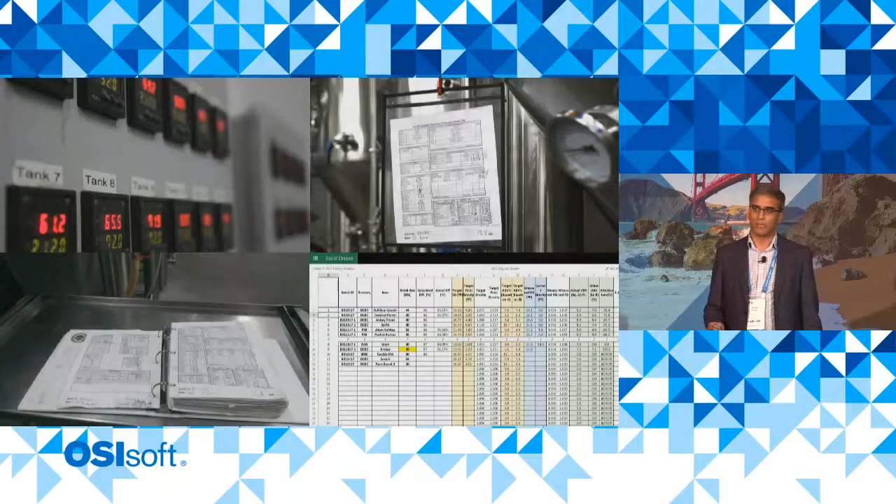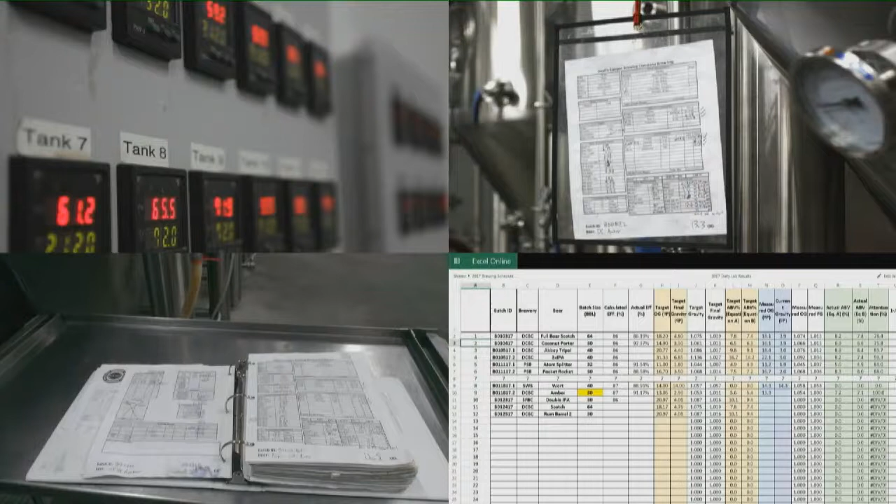So firstly, the scenario, the Devil's Canyon Brewery, which is in San Carlos, California, about 30 miles from here. It's a craft brewery, has 18 fermenters, makes really great beer. And their process, like all breweries, is a batch process. So this is what they have prior to us coming in with Pi System and National Instruments.

They had unconnected programmable logic controllers measuring temperatures and set points on 18 fermentation tanks. They had a manual logging procedure for specific gravity measurements, critical measurement in the fermentation of beer. They transferred those manual logs to a binder. Once in a while, they typed them into a spreadsheet on a PC, and that was their analytics. Not exactly real time, worked, but has some limitations when you try and scale up production.

And so we came along and we instrumented, together with National Instruments' help, using the CompactRio platform, a number of the fermentation tanks. In fact, this fermentation tank on this banner is about half size of the real one that's 35 miles away in San Carlos. This is fermentation tank number 6 out of 18 in the brewery. There's a thermocouple and a few other sensors, CO2 and pressure CO2 sensors in there as well.

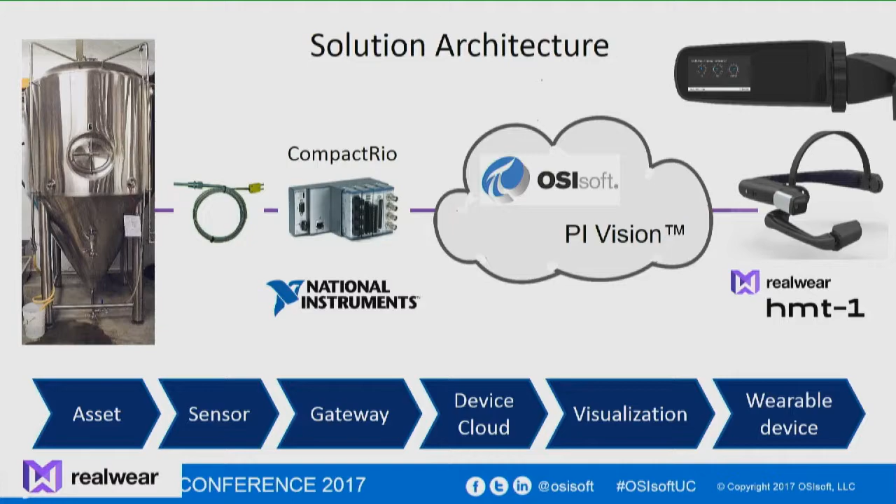Goes into the CompactRio platform. That is then connected through the cloud to the PI System and the PI Vision server. And we are going to view some of that data on this wearable device, the RealWear HMT-1 or head-mounted tablet. So if I can move to the demo, please.

So you are seeing on the projector what I am seeing in my micro display. It looks to me like a 7-inch tablet about arm's length away. It's, as you can see, quite detailed. This entire device is hands-free, so I've re-enabled the voice recognition, and I will now start up CoreSight. My programs. CoreSight. It's a little app that's going to visualize CoreSight data for us.

Okay, now it's looking for a QR code to log me in. There's one on that tank, in the real tank in the brewery, and there's also one on this picture of the tank. Let me go and scan that. Got the tank. We've got an error there. Here it comes.

Okay, so what you're seeing now is live data from this brewery tank, from this fermentation tank. You see CO2 pressure. You see specific gravity. That was a manually entered measurement because it's a manual procedure, but the data is in Pi system. And you see the current live temperature of 32.887 degrees Fahrenheit off fermentation tank number 6. This is live data. Show temperature graph.

So now what we're seeing is a visualization that is actually hosted on PI Vision, and we're looking at a web object that was built by PI Vision that's now encapsulated in this native Android application, which has full hands-free voice control. I haven't had to swipe or use any gestures or use my hands at all.

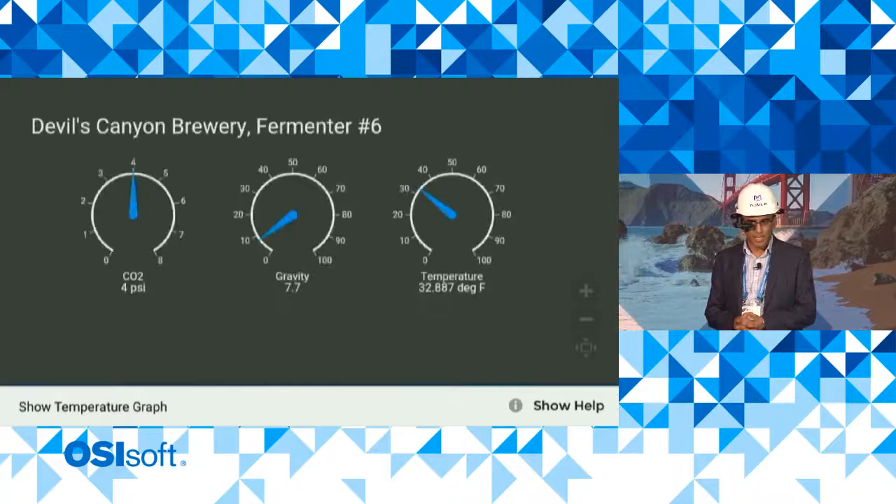Okay, so there's something else I can do with this system as well. And so what I'm going to do is go back to the home screen, navigate home, my files, and scan bookmark. There's another QR code on this tank up here. Go look at that one.

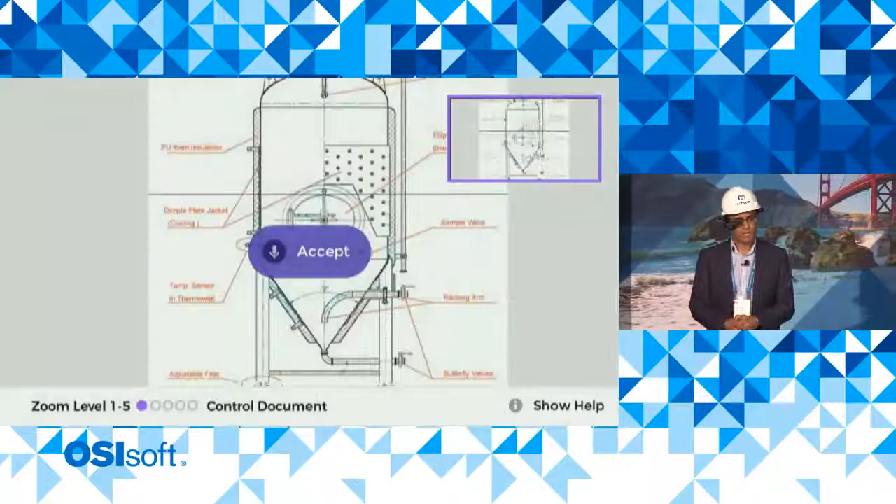Accept. Okay, so that actually brought up from the cloud an engineering drawing of this fermentation tank. So we've contextualized this asset, which is a live asset, not only with live data visualized in CoreSight, but with other data about the asset, in this case, the mechanical drawing of this exact tank.

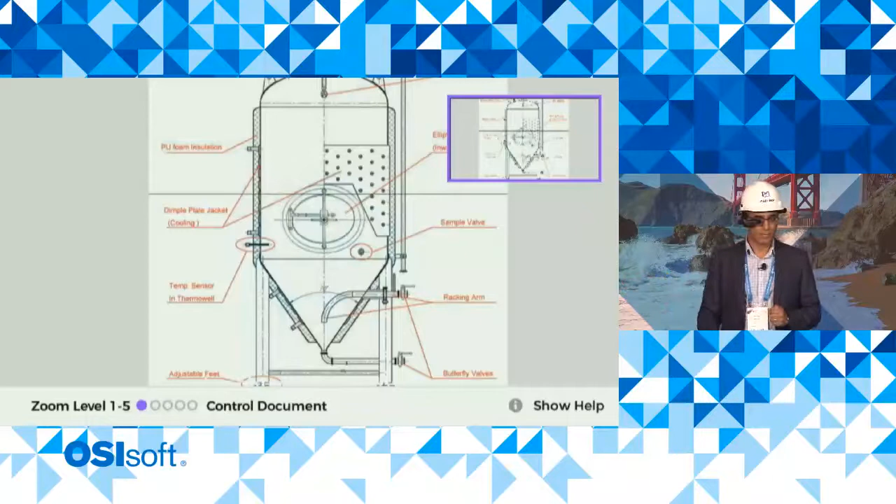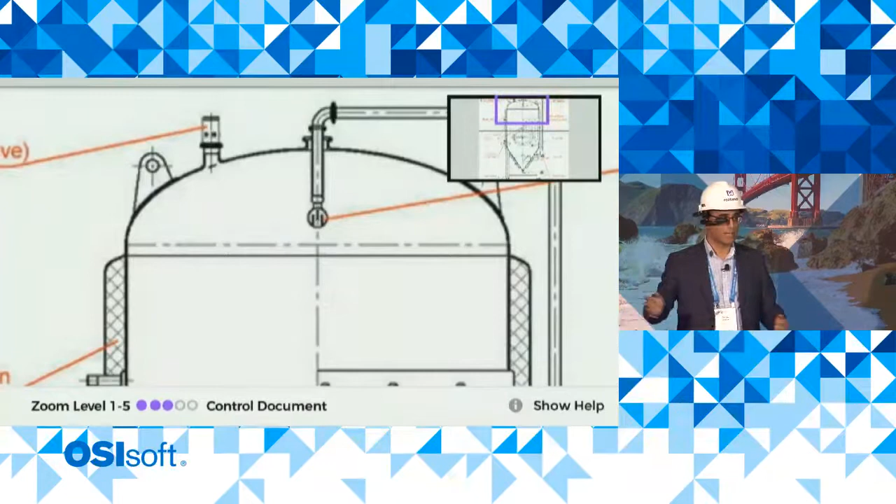Zoom level 3. Control document. And I can look around this and look at the detail of the drawing if I want, find the exact feature that I need to look at, freeze document, and now I can do my task with my hands free, perhaps maintain this tank, perhaps change a fitting, do whatever I need to do. Navigate home. If we can go back to the slides, please.

So the second demo that you saw, by the way, I'm just going to easily move this out of the way. It's one of the best features.

The second demo you saw was scanning this bookmark, which is associated with metadata in our cloud, which associates where that document is in the cloud, including its page number, zoom level, coordinates, so that I get just the right framing. And in just a few seconds from scanning the physical asset, I can see the actual data. And indeed, this service goes nicely alongside the other data we get in CoreSight.

So a little bit about the product. Let me just mute it. Mute microphone. There we go.

So it is a full Android tablet, a very powerful Qualcomm-based system with an 8-core processor. It's rugged, 2-meter drop test, IP66, fully dustproof and waterproof. There is an intrinsically safe model that will also come out later in the year, which is a full FM C1D1 ATEX Zone 1 product. And it has a full shift or 8-hour battery life.

It can also do video streaming for remote assistance for technicians, data entry, work instructions, all manner of applications that you could run on any full-featured, recent, fully powered Android tablet, but totally hands-free.